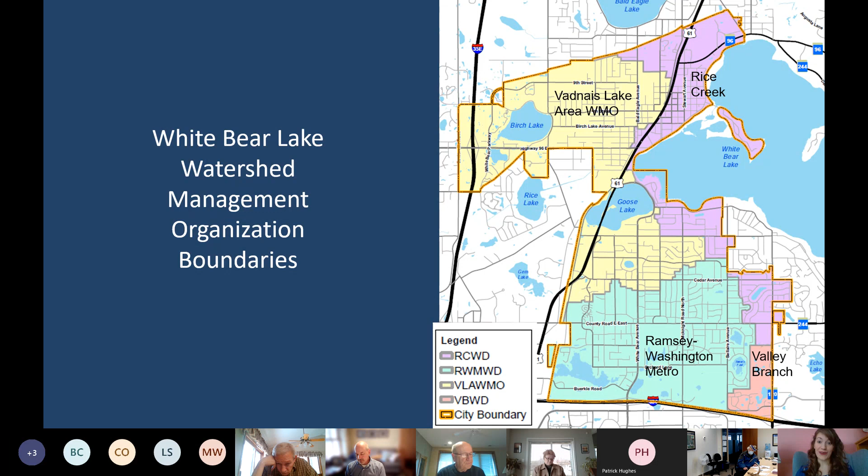The city has also listed that they are a regulated MS4 on the Bald Eagle Lake TMDL, the Peltier and Centerville Lake TMDL, the Upper Mississippi River Bacteria TMDL, the Twin Cities Metro Chloride TMDL, and the South Metro Mississippi TSS TMDL. To address these issues, the city has identified many projects on page 65 in your packets.

Notably, the city would like to partner with the district on water quality and stormwater volume reduction projects. The city would like to continue working with the district on adding rate control and volume control practices in conjunction with the city's street and parking lot reconstruction projects, including adding curbside or curb cut rain gardens in residential areas, numbered 1.4 on this slide and in the table on page 65. This also includes conversion of alleyways to pervious pavement, which is number 1.2 in the table and on this slide.

Additionally, the city plans to retrofit manhole structures to White Bear Lake, which is number 1.7 in the table and on this slide, and add stormwater treatment to city parking lots, such as the Matoska Park parking lot, which are numbers 1.8 and 1.9 on the table. The district did recently approve cost share funding for project number 1.8 through the Stormwater Management Grant Program to install rain garden turrets to the Matoska Park parking lot.

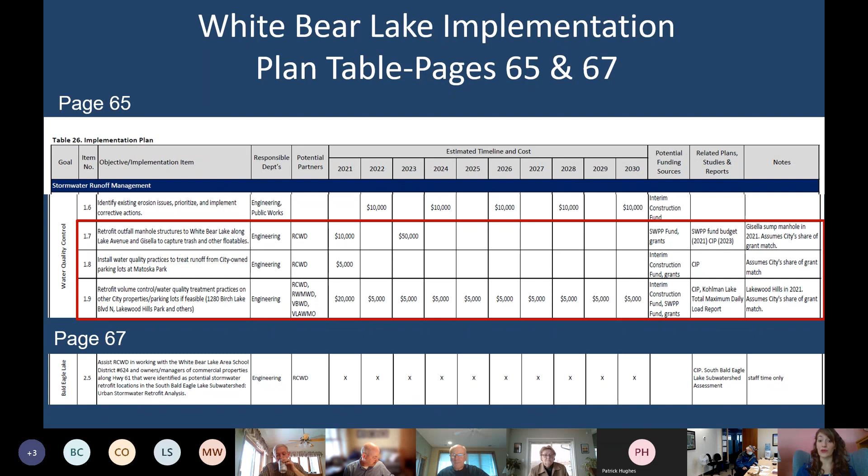The last project I'll highlight is on page 67, number 2.5, at the bottom of the slide. The city plans to assist the district in a partnership with the White Bear Lake Area High School North Campus and Minnesota Water Stewards to incorporate stormwater treatment opportunities identified in the South Bald Eagle Lake Urban Stormwater Retrofit Analysis Report. District staff had initial conversations with the school last year, and we hope to continue having those conversations with them in the next few months.

To conclude, staff find that the City of White Bear Lake's local water plan is consistent with district and state statutes. Staff recommends approval of the City of White Bear Lake's local water plan as submitted to the district on April 7th of this year. Are there any questions for me on this one?

Madam President: Go ahead. Manager Bradley: I could ask Lauren, so they've got pink colored and green colored and white colored sections. Can you tell us the relevance of that? Lauren: Oh, I'm sorry, I'm having some technical difficulties. Can you repeat that, Manager Bradley? The document you sent to us is color coded, but I couldn't find a code that explained the coloring. Are you referring to the table, the CIP table color coding? Yeah, pink, green, and white. The green are the low priority projects, and the red is high priority. I believe there was a legend somewhere, I think towards the end of the table. I accept your explanation as my legend. Thank you.

Any other questions for Lauren? If not, we do have a resolution on page 62. Madam President, I would move resolution 2021-05, which approves the White Bear Lake Water Management Plan submitted on April 7, 2021. I'll second that. We have a motion and a second. Any further discussion?

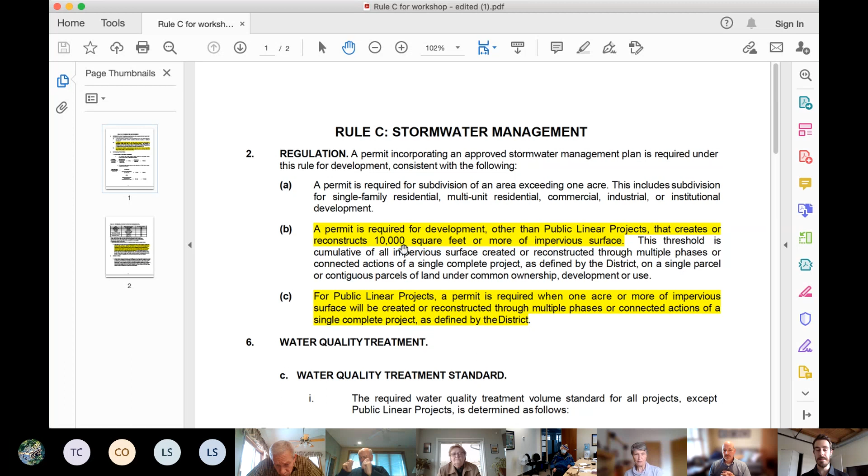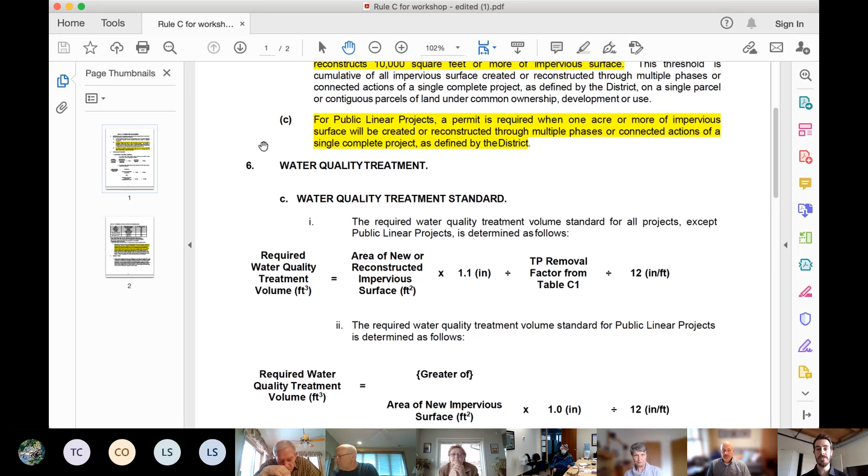The district starts requiring stormwater management typically around that 10,000 square foot threshold, for private development. In our rule revision, we updated this for public linear projects, now up to an acre. So when a project has that much impervious surface, new or reconstructed, they have to consider our water quality treatment standard.

You see the two different equations here. The first is for private, non-public linear development, and the other is for public linear projects, new and reconstructed impervious surface. This tells them how much water quality treatment they will need to provide for their project.

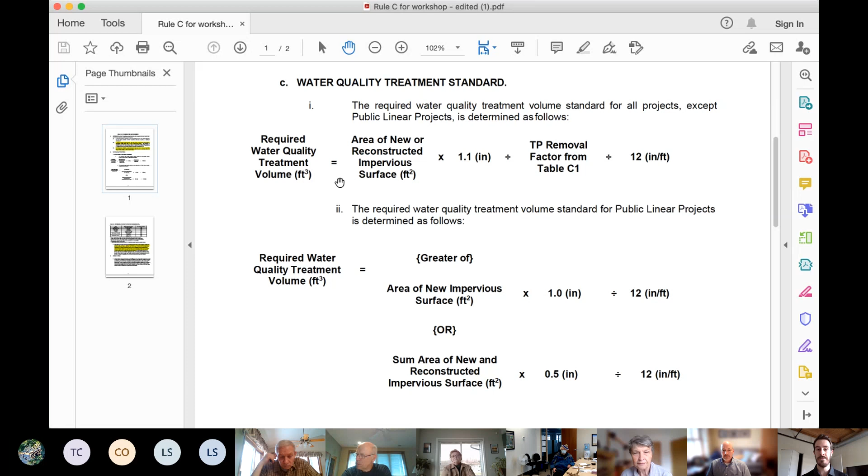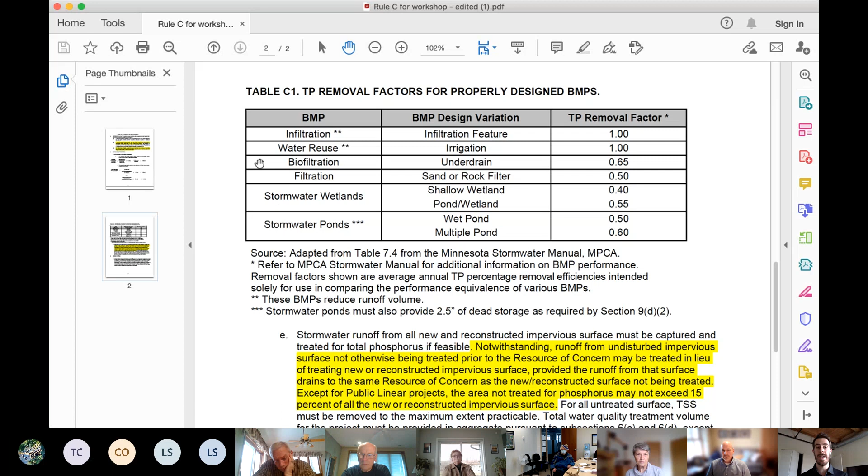Moving further in section C of the rule, you see Table C1. Infiltration is required first and foremost in any district application. If folks are unable to provide infiltration, based on soil types and those sorts of things, they are allowed to propose something different to meet that obligation. Those other options are shown here in the table.

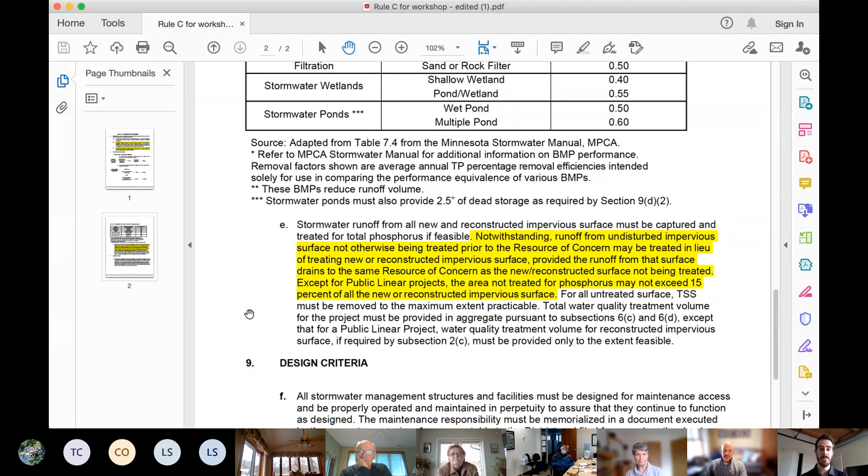I included section E here as well. This talks about how much of the site needs to be treated, the effort that needs to go into providing that total phosphorus removal. Specific to our discussion, I also wanted to include section 9 on design criteria.

This clearly shows the need for any of these basins to be maintained in perpetuity. Our private developers must record a declaration on their property title that will run with the property if there are new owners.

Our public projects can also record on the property title, but it's much more common that they'll just enter into a signed maintenance agreement. Some of our cities, and I think one of our counties, have gone through a programmatic agreement, so they don't have to do an individual agreement every time they have a new project.

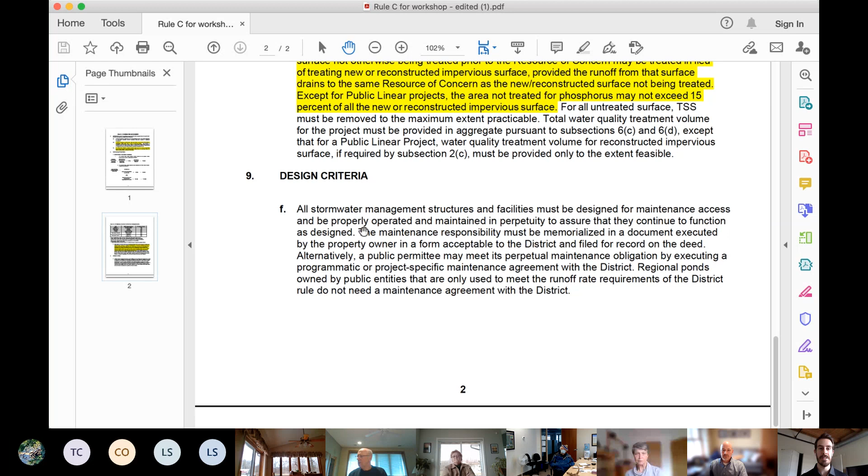So I wanted to highlight those few parts of the rule for Rule C. Once the application has demonstrated that the rule criteria are met, it's either noticed to the Board of Managers for a 48-hour comment period and administrator approval, or brought before a board meeting, like on the consent agenda today.

The applicant needs to submit any conditional approval items that are still outstanding, including that stormwater maintenance obligation. Then the permit can be issued and the relevant RCWD inspector is notified. In this case, for the North Meadows project, that inspector was Terrence.

Could I ask you a question, Patrick? Certainly. You said one of the counties has gone through a programmatic approval. Is that something we should encourage the other counties to go through so it doesn't happen every time there's a project? Yeah, it's something we've mentioned to some other folks, other cities and things.

Yeah, I think it can be a time savings. When you come through with a new project, you already have the agreement in place, and then they just make their intention clear that they want to include these new basins into that agreement. Well, maybe we should put that on our next city-county meeting. Sure, and reinforce the idea. I like it. Okay, thank you.

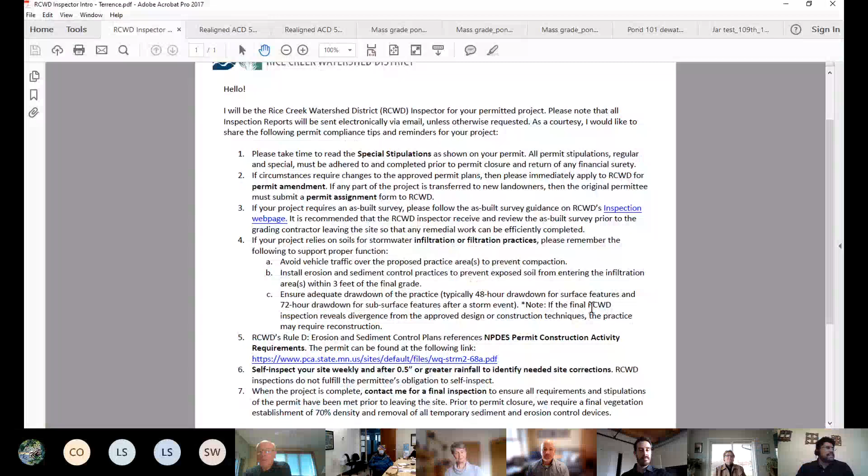I am going to share my screen here, so let me know if you can't see anything. When a permit is issued, the applicant and their team are sent the permit, and typically a city is CC'd on those emails, but the regulatory team also includes this inspector introduction letter, which you can hopefully see here.

And within that letter, it kind of just highlights some of the important things that the applicant and their team should be considering going into the construction phase. I think the most important thing on here is the special stipulations.

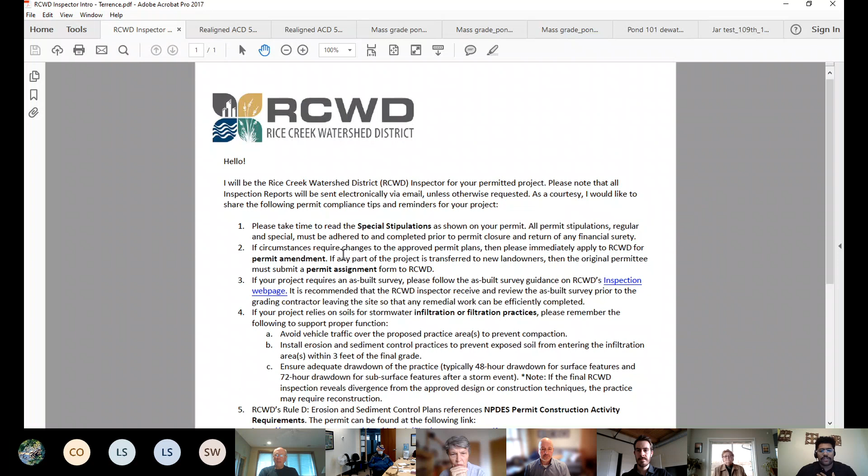A lot of our permits, the most common special stipulation is the as-built requirement. So someone says they're going to build a certain stormwater pond on the landscape, and in order to meet our rules and show compliance, they have to provide as-built survey information of that particular pond or basin. We'll review those as-built survey information and then confirm compliance. This is something that typically gets shared when the permit is issued, and it doesn't happen for every single project, but ideally it would.

There's oftentimes pre-construction meetings, and Rice Creek Watershed District inspectors will certainly try to attend those meetings when possible. During those meetings, it's a good opportunity for us to establish strong relationships with the applicant's team and the contractor that's going to be involved with the project.

We do a lot of schedule coordination during those meetings, so we'll learn about when the project is anticipated to start. There's also oftentimes utility subcontractors there who'll have their discussions about utility work and things like that.

There's usually a multitude of other regulators in those meetings. For example, I was just at a pre-construction meeting yesterday virtually, and it was a city road project, but there was also a county representative there, and also a MnDOT representative. It depends on the project, but a lot of times there's quite a few folks in those meetings, and it's good to start establishing those relationships. You'll get the contact information and things like that.

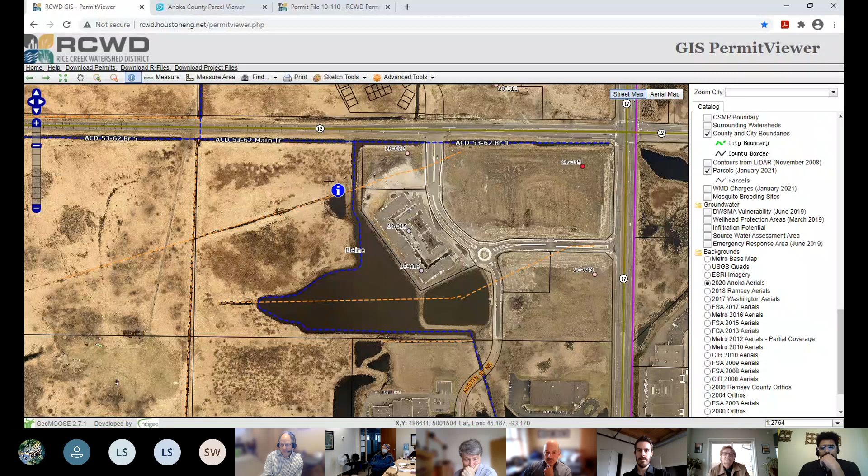And really the reason why we had the alignment changed as shown here officially is that if, for instance, sediment were to build up at any given location, for instance, near where the channel outlets into that excavated area, the district would have a stable location with which to complete maintenance activities there. So essentially, it's following a path with which the district can access along the edge of that excavation in order to dip out if it needed to and in order to complete maintenance.

And again, it also provides an access corridor, for instance, if the district were to need to complete excavation work on the more channelized area north of the excavation, they wouldn't have to necessarily cross the ditch along 109th Street. They could actually probably access from Austin Street and walk the excavator all the way along there. So again, it provides a means with which the district can provide a narrowed right-of-way defined along the ditch.

One other thing to note is that the district did not initiate any of this, nor did it complete any of the activity in this location. All it does is simply address a petition that the landowner completed. And so when the landowner petitioned, the district had to review it underneath the statute and determine whether or not the criteria under the statute were met. And the way the statute reads is that the district must approve a realignment or a partial abandonment if the benefit is met and there is no damage occurring to the drainage system. And so when we review it, we determine that, yeah, the petitioner met this criteria, and therefore we recommend the change.

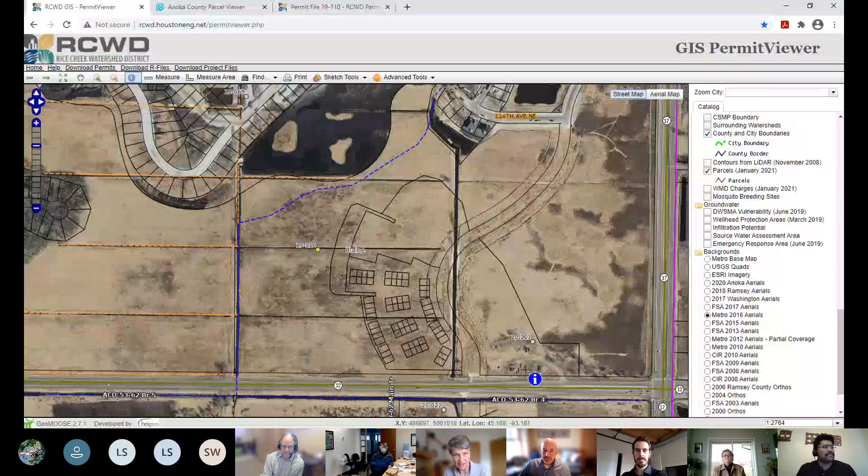Can, yep. Terrence, why don't you continue this, because I think we're going to be a little off track and go north here to the other side, because this is bringing up all kinds of questions. So can you show us, as part of your presentation, what's happening to the north? Manager Wagamon, yes, it is. I can continue that discussion. I was just simply looking to show what had happened recently on the south. Yeah, so I will bring the focus more to the north now.

So this is the North Meadows development. Again, we had Lexington Meadows down here. North Meadows is primarily this area here, and then further north is an existing development. So let me just look at my notes here.

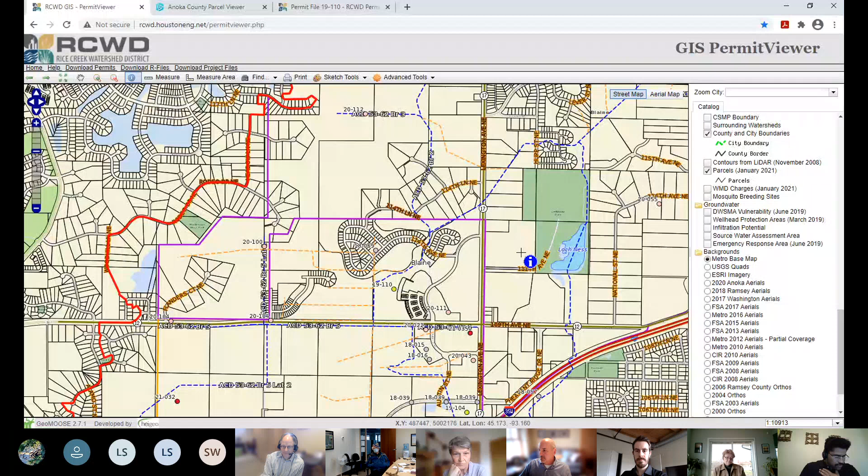So what I wanted to do next, I'll stop sharing this screen and share a different screen, to show a few photos of the site when it was in its mass grade phase. So what you're seeing here is the contractor as they realigned the public drainage system on this section of the development. I'll break things down on a plan sheet showing the relevant features, but I wanted to show the photos first. This is a few photos of the realigned public drainage system, main trunk of ACD 53-62. These homes up here are an existing development that was permitted in 2015.

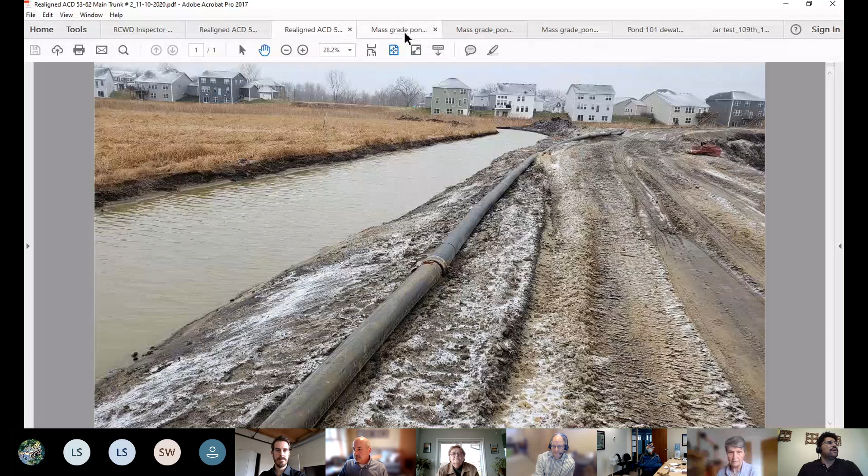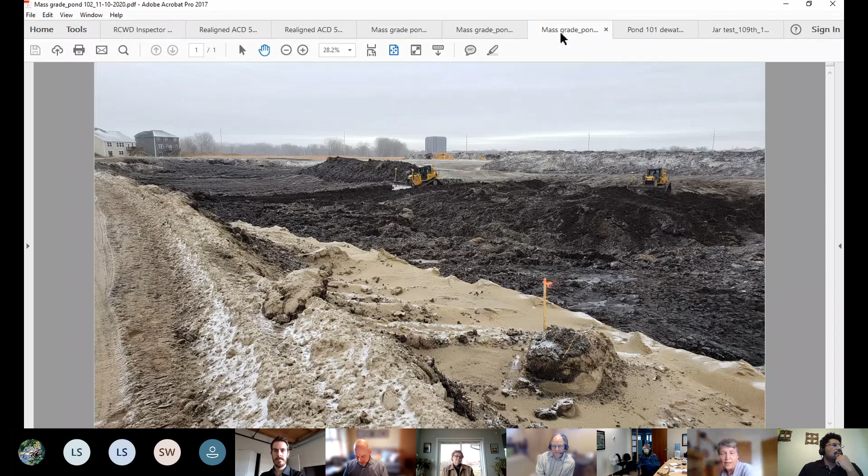This is looking towards the office, right? No, this photo is actually looking to the east. So if you can imagine, Lexington is running this way. And then this is looking south. This is 109th, kind of back in here.

Again, just a mass grade. The photos don't do it justice, but I'm pretty high up compared to where some of the work is taking place. Here's another photo to share, same perspective. 109th is down here, and that other development is in the background.

And then, I mentioned during dewatering, making sure that the water being discharged into the ditch is clean. They had to do quite a bit of dewatering for this development and the one to the south to get their stormwater features and basins constructed during the mass grade phase.

This photo is taken from me standing at 109th. You can kind of see the aprons here. Not the most ideal, and I know the ditch clarity alters throughout the year, even without construction. But you can see the goal of doing this, and I've done this with other sites too—ideally you can clearly see my fingers through the jar. You can pretty well see them in this photo, but in instances where there are issues and it's not as clear as we'd like, I try to work with the contractors to come up with solutions upstream.

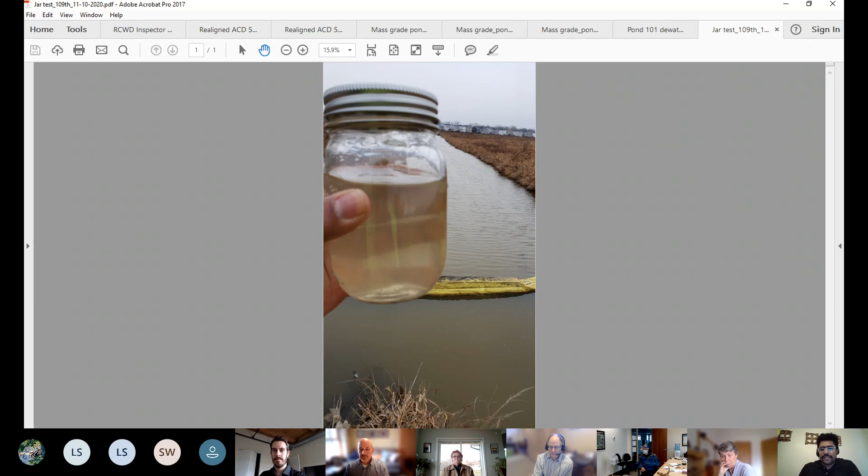And then the last thing I will share is—let's see where it's at, give me one second—I just wanted to show you the approved plan. Here it is.

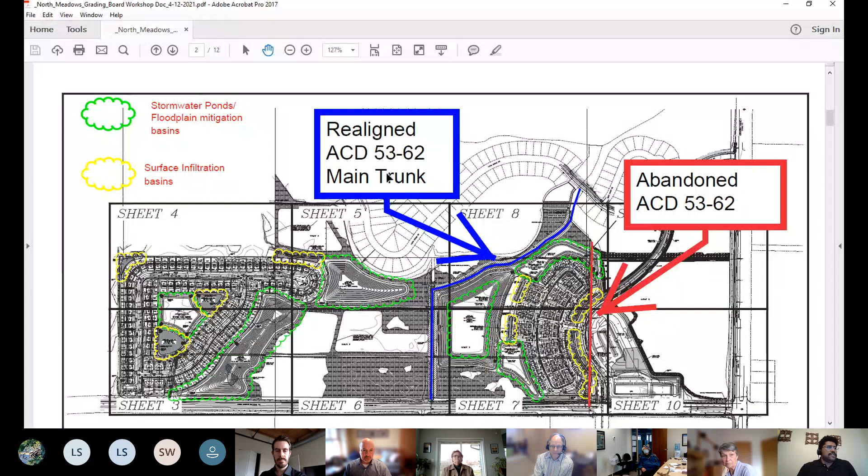So this is just a highlight of the North Meadows development. Again, this is 109th here, you've got Lexington here, existing development to the north, and the red here is what was the existing ACD 53-62 main trunk, which is now abandoned. It's been filled in, and you've got more of a defined road here now. This is where the realigned ACD 53-62 main trunk has been set here in blue, and that connects and continues further south, as we saw in the aerials.

I also wanted to highlight some of the stormwater features and different basins and soil correction ponds that are part of this development. In green here, you have stormwater ponds and floodplain mitigation basins. I'd say most of these have reached their final grade. We haven't received as-built survey information for this development yet, but I anticipate that coming pretty soon, because the developer has reached out asking about surety reduction and permit closure. Then in yellow here, these are the anticipated proposed surface infiltration basins. So you've got a few different features, and the site is kind of split between the east and the west.

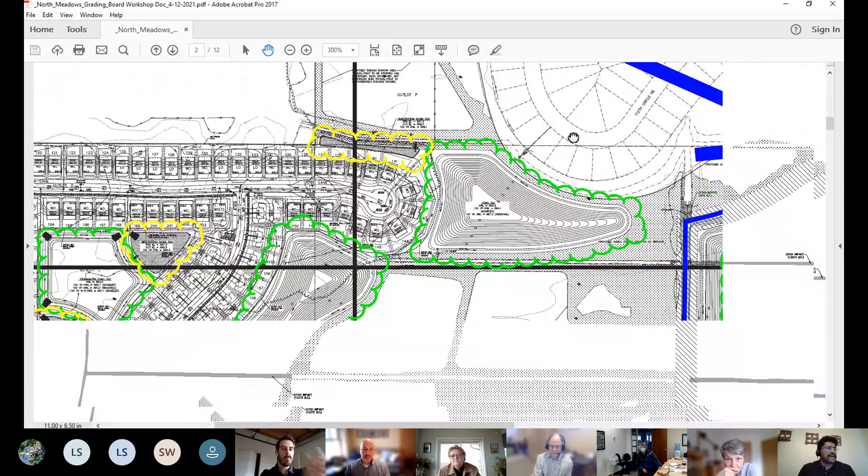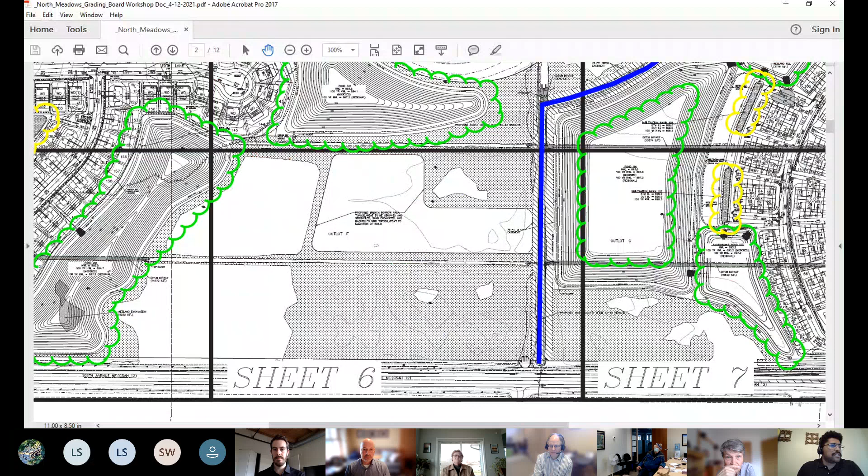It's probably a little tough to see here, but for both this development and Lexington Meadows to the south, we did require them to outline a pretty extensive maintenance corridor for us to be able to get in and do the maintenance needed on a public drainage system. Zooming in a little more, you can see the hash line here—that's for the maintenance access. They actually put in a culvert crossing, and the primary reason for that was for maintenance, so we're able to access this part of the ditch that follows along this corridor.

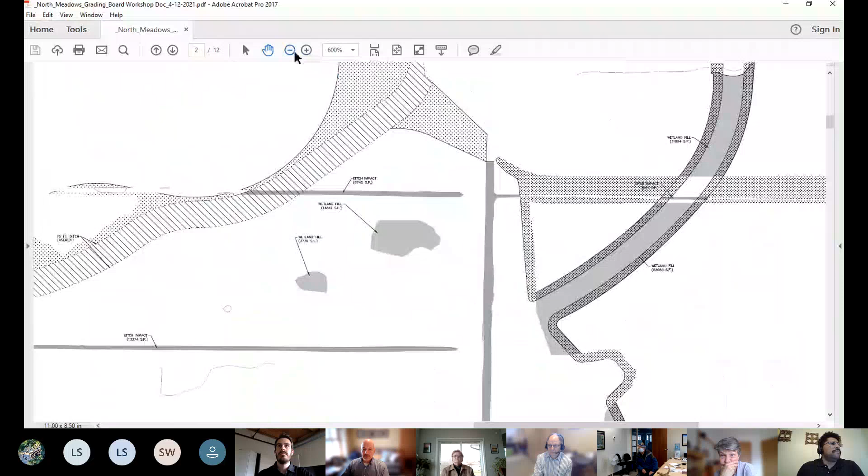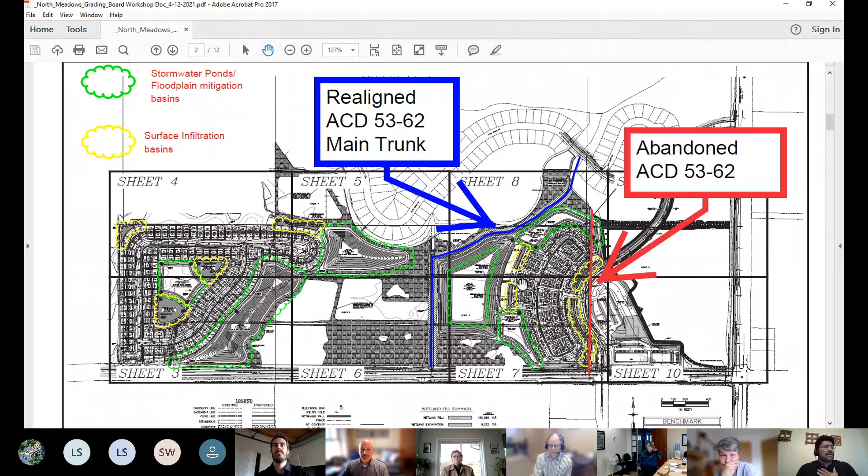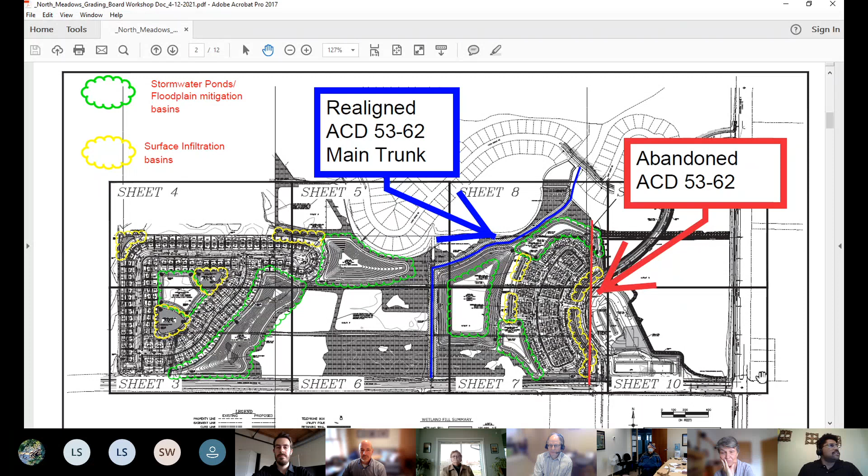So this is kind of what's going on with the North Meadows development. The ditch has been realigned, so this is now the new main trunk, and a lot of these features have been graded and are likely at their final grade. Moving forward, the development is currently working on a lot of utilities since they don't have any roads in yet. So there are some new stockpiles of sandy material, and they're doing some dewatering, which I continue to monitor. With that, I'll open it up to any other questions about the North Meadows development or stormwater features in general.

President, if I could just ask, so on the other, the south one, where there's the 30-foot deep excavation, unless that becomes a lake where it gets filled with sediment, are we even going to have to worry about maintenance of the ditch in between?

President Reiner, go ahead. This is Nick. Manager Bradley, no, that was expressly pointed out in the engineer's report that the maintenance, or any additional excavation of that excavated area, is not the responsibility of the district.

Historically, our communications on these types of applications haven't included that clarity. So you might imagine 10 years from now, the folks in the apartment building say, this is green and scummy and we don't like it, the lake is a problem, Rice Creek, what are you going to do about it? So the district will rely on the language in that engineer's report showing that it is not a district issue.

The public drainage system is the district's issue. And as Chris noted, we have the maintenance bench along the side, and we can address our obligations from that point.

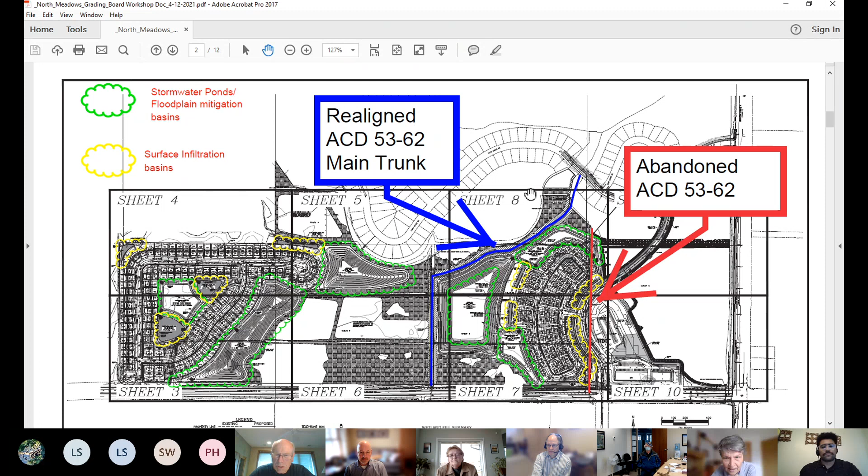So Terrence, with this on the screen, those deeply excavated areas, will they be considered excavations also? And where am I looking? Because those suckers are pretty big, pretty deep, like right there. Yep. This, yeah, I'm looking at that, must be the west of the ditch. You have some real ones there.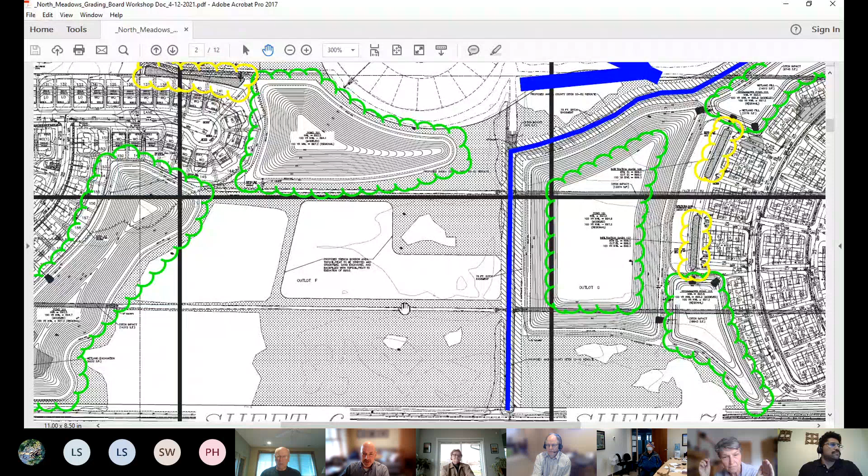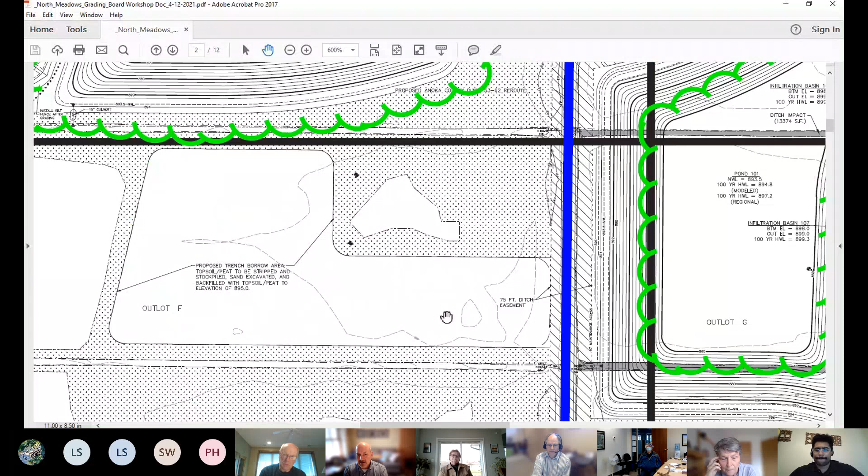President Preiner, go ahead. Manager Wynett, yes, Terrence, it's in between all those green stormwater BMPs, which are designed for a specific capacity. Those open areas, there we go, right there, those are borrow areas, largely dependent on the expectation of how much material is available there for the soil correction on the site. There is some review, of course, to ensure the stability of the district's interest, but those are indeed those excavations that a person may call a lake, if you will, in the future.

Okay, so what about to the top of it where there's grade, you've got grades, you called them, go up a little more, right there. Yes, those areas within the green clouding, those are stormwater facilities that are designed to meet the standards of the district rules. Those have operation and maintenance obligations recorded against them.

Nick, wait a minute. Patrick, go ahead. Sorry to jump in there. So there are three larger areas here, this is one of them, Pond 301. So it's Pond 101, 201, and 301. They do refer to them as ponds here, not lakes, but it's interchangeable, and we see it on other projects.

Those are actually not used for any stormwater management, for water quality treatment, or for rate control. So they are actually not captured under the maintenance declaration.

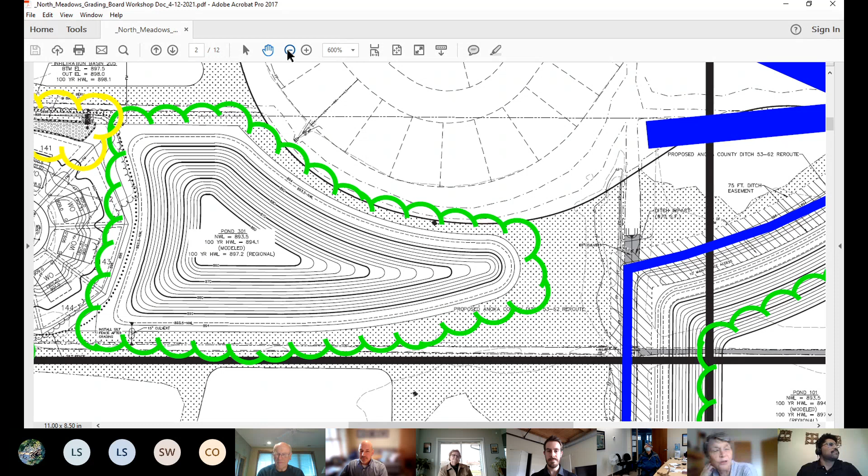Okay, well, Madam Chair, I think I have a 30,000-foot question about this, especially if you've driven by it and thought, oh my goodness, this was a wetland. And back where I came from, you weren't allowed to fill in wetland. I understand you're taking one square foot here that's wetland and changing it, making another wetland someplace else, and all of that. My question to the board and to staff is, is this what the applications are going to be looking like over the next 10 years?

Are we going to see these, as Terrence, I think you referred to this as a large development? Is this our future? I know we talked about it in the water management plan, but at the same time, when you actually drive by it and it's there on the ground, it rather struck me as just a lot of dirt work.

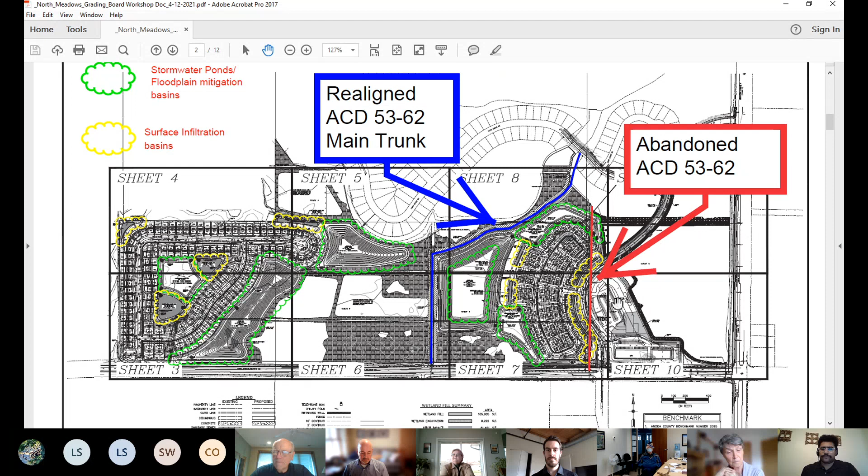Can I say one thing on that too? Because we're using up all our higher and better land, I think we are going to see more of this, because otherwise all progress and building will be stopped. So everybody's going to get more creative and try to get the same results at the end, what we're supposed to do through our rules. And there just isn't good land, I mean the high and dry is pretty much gone around here.

So, Madam President, my hopefully last question is, as long as we have the BMPs for the actual building, if they have these excavations that turn into mini lakes, does that help us regionally, or is that another problem we need to address? The storage.

Manager Bradley, Manager Wynett, Board of Managers, I can speak to some of these items, and then I'm sure Patrick and Nick might want to also chime in.

So I think the first question was just whether we're going to see these large-scale developments continuing in the district, I would anticipate that would be a yes. I believe there's already quite a few in the hopper in the region of Blaine. Blaine and Lino Lakes, two regions in my territory, are developing very quickly, and have been over the last few years. I don't see that slowing down unless there's some change in the housing market.

And then to the second question about storage, for this particular development, Patrick had made the comment that there's only a few of the stormwater ponds that were used to meet our stormwater requirements. I believe they also use some of these basins to mitigate for floodplain fill, because these large developments, if there's a floodplain, are going to be making alterations to it. So some of these excavation areas highlighted in green here are also utilized to mitigate for the fill within the floodplain.

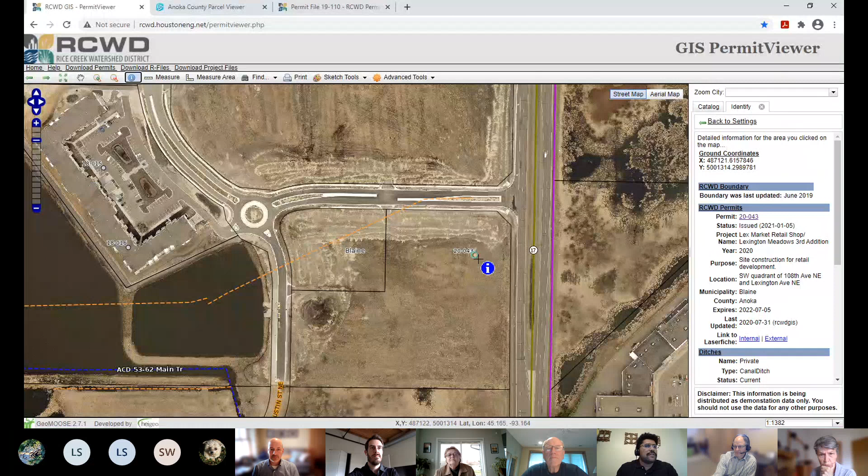You're muted, Terrence. Manager Wynett, Board of Managers, I can let Patrick and Chris speak to the permitting aspect of things. It's my understanding that they could utilize it and maybe will be utilizing it here and there. What you see right here, this permit 20-043, let me just confirm that—this site is currently being developed, and they have been installing their own stormwater features for this site. So I think it's all dependent on how they come in for application and how they're meeting the rules.

President Preiner, go ahead. Manager Wynett, I'll advance that a little bit. The initial permit may establish a regional basin that we're seeing on the site there next to the excavation, to the southwest of the roundabout. And it's recognized as having some given capacity, and it's memorialized in the engineer's report accordingly.

The next phases propose some general amount of impervious area that may or may not utilize that regional capacity. Depending on how that develops, because the owner wants to be nimble about who might come and how this property might be used—wanting to be flexible to regain their investment—that may change the necessity of stormwater and such.

So generally we anchor the amount of regional capacity that's being created. As future permits and developments come in, we look at those and look to that applicant to define that they're using the regional basin. Then we do the technical check to make sure the capacity is present, the BMP is being maintained, etc. If it doesn't have the capacity, they'll need to come up with something specific to their site.

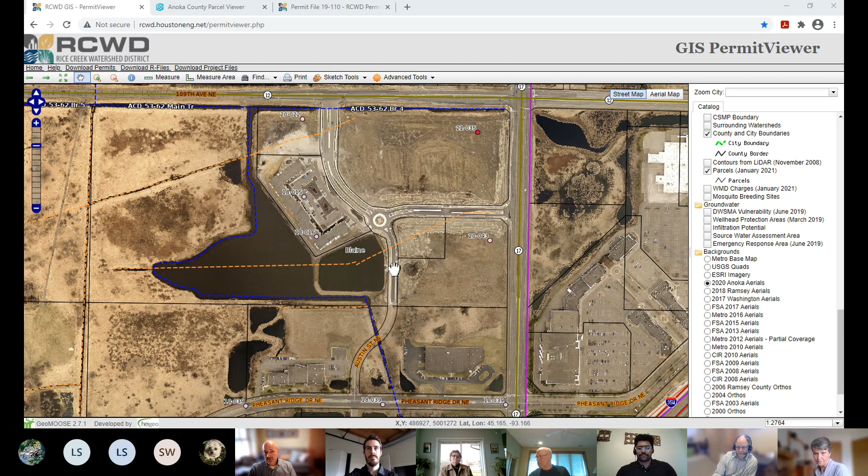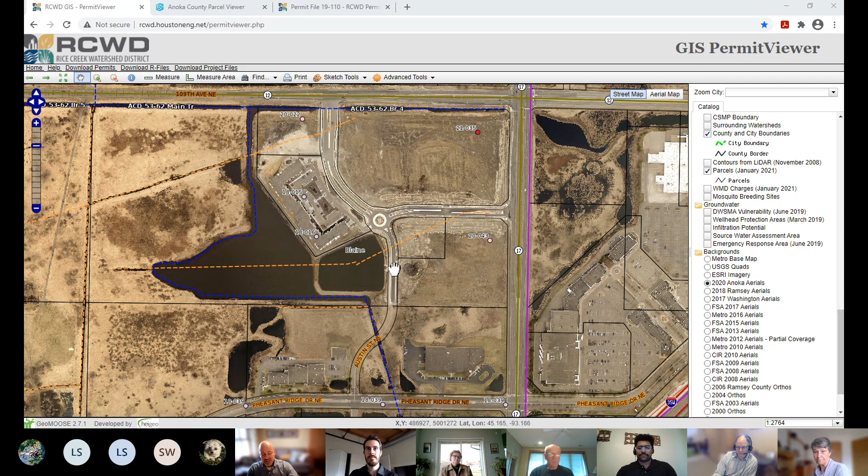to have that kind of cost associated with permit review on these larger projects. And the fee for a project like this might be more in the $3,000 to $5,000 range. So the district does subsidize, if you will, the overall cost. A lot of cities, I would understand, establish a broad escrow account and then just draw upon it, and all the cost is put upon the applicant. That's not been the district operation to date.

One more question then about permitting. Does this go full circle, so that our permits, when ours are closed, the city would get a copy that it's closed to go into the developer's file? So that at the end of the day, somebody comes in and says, well, I didn't like the way they did that, the city can look at it and say, well, this is what happened and here's what they did. It'd be nice to have a complete file somewhere.

President Preiner? Oh, I see Terrence turned on his microphone, I'll let him go first. Okay, President Preiner, yes. So when Rice Creek Watershed District inspectors close the permits, we routinely will include a notification to the city that the permit's being closed. I couldn't tell you that the city is recognizing that, because I've certainly seen where someone might come back to me and say, is this permit closed? And I can confirm with them that it is indeed closed.

For our files, we do have a permit closure memo that we fill out or draft up for every permit, no matter if there's surety or not. So in our internal files, we have a permit closure memo that will outline that the applicant has satisfied the as-built requirements, for example, and note that it's being closed on this date. And if there's surety that we have on hand, we'll note that we're returning that surety to whoever it goes back to. So internally, our files recognize when a permit is being closed, and we do provide that notification to the applicant and subsequent city.

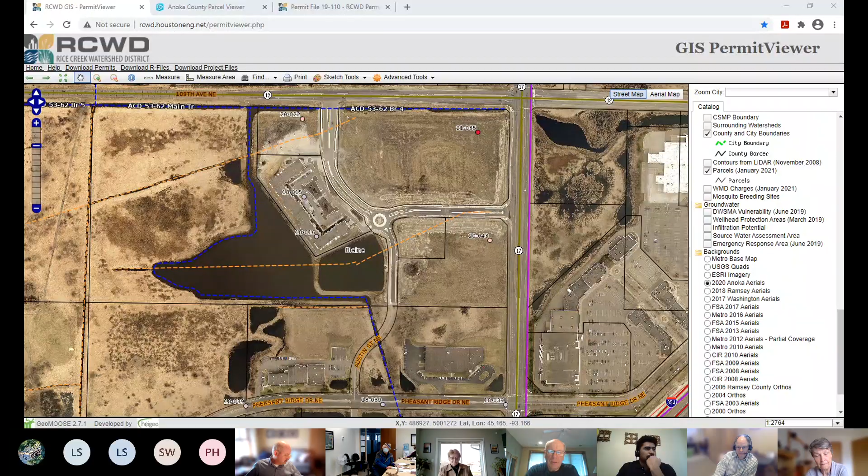I prefer the drainage system to be maintained and the right-of-way to be maintained as it was on the north side of 109th and not on the south. I don't see why that system couldn't, it was much more to the east. Even though they want to put a development in there, it could incorporate the amenity as has been done in Hugo with bridges over it and creek streams like on ditch number 3, without having to alter the right of way in such a radical manner.

I do think, though, Patrick, that there are advantages that you're not totally explaining to the stormwater conveyance system of the stormwater ponds.

They provide a rate control and a volume control, not just a water quality control. Those are important items so that we make sure our system isn't overloaded. That's one of the things Terrence was bringing out when he's talking about dewatering and how the system gets overloaded from dewatering. So with my view that we're here to make sure the stormwater conveyance system works, those stormwater ponds are integral to the volume control, rate control, and storage capacity, as Manager Bradley brought out. They're very important, and you should emphasize that along with the phosphorus control and sediment control, because that's how they are maintained.